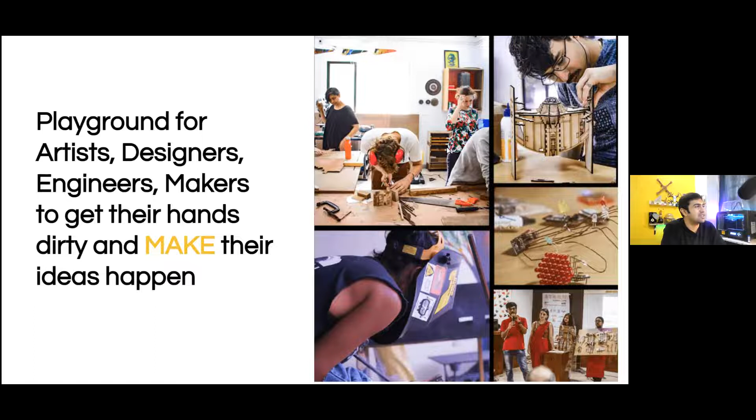Giving you a quick background, Makers Asylum is a playground of its own sort for different folks like yourself - artists, engineers, designers, people from all different backgrounds - to come together and build stuff. That's how Makers Asylum started, in a small space in Mumbai to create a space for people to build things. Now we're in Goa, inside a heritage home, but inside there are a lot of different tools. When we started, because we have these labs from 3D printers to laser cutters to carpentry to electronics, a lot of people started coming to us to also learn, and that's when a lot of our programs began.

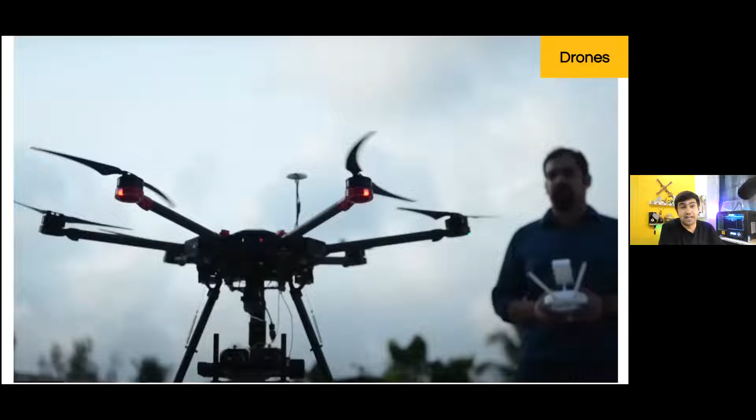This is one of the exciting programs you guys might be a part of, the robotics program happening over the summer. Slowly these programs started to become bigger, and now there are alumni from our program in 30 countries. So that's a little background about Makers Asylum - it's an alternative education space where people come to learn how to build things with their own hands and try out different things with technology. A lot of different startups have come out of our space too, including Quidich that works in drones.

Now, I think all of you guys know a little bit about drones already. These guys are shooting all the IPL matches. Some of you might be cricket fans - how many cricket fans out there? Raise your hands. There you go. So some of the drone footage that you see is actually from Quidich, one of the startups that was born at the Asylum a long time back.

Prosthetics. Now, one of you talked about how you can make robots that also integrate with human bodies. So there are a bunch of guys still working on prosthetics and building robotic arms that are able to sync up with your body.

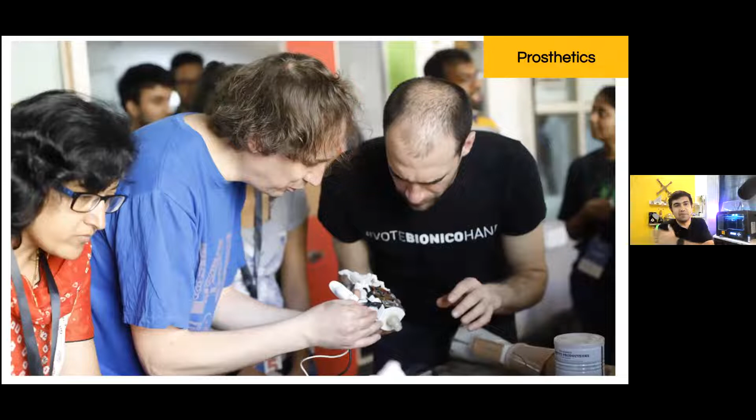Today's guest speaker is going to be Orangewood Labs. Orangewood Labs started off with the simple thought of making customizable furniture. However, from there, they went to Y Combinator in the United States and did a lot of exciting work. Now they're building 6-axis robotic arms that can do a lot of things. Abhinav, who's joining us from Hawaii in the middle of the night, will be talking more about it. I'm going to try and catch hold of him in a few minutes.

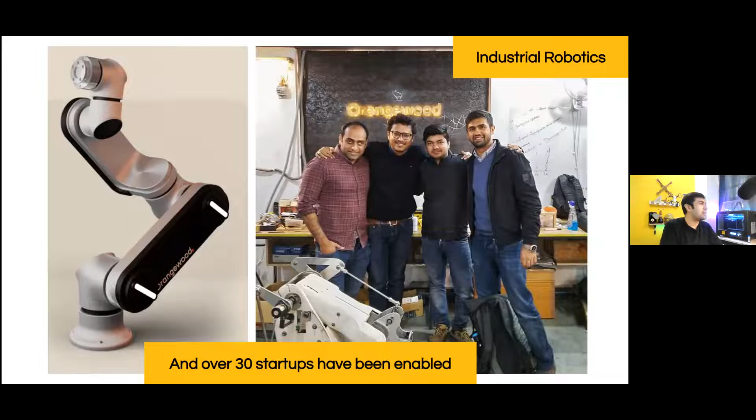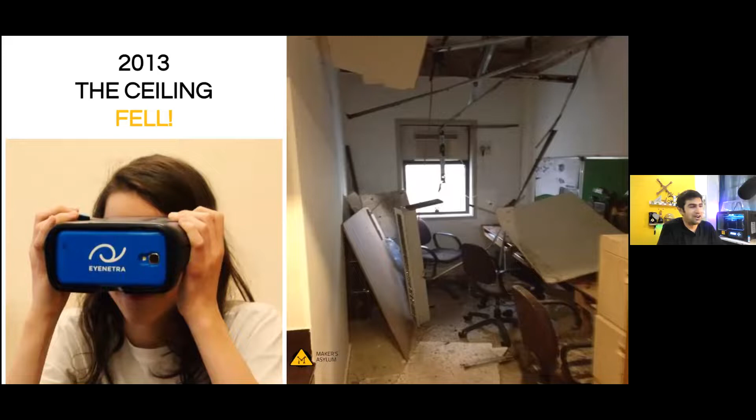All of this, Makers Asylum, started in 2013 when I was working on a different device called EyeNetra, and the ceiling of our office broke and fell down, breaking pretty much everything inside our little lab in Mumbai. That's when a bunch of people got together, guys like you and me, to build simple things like furniture. That's how Makers Asylum was born in 2013, through a little activity just like this. And then eventually we set up our own little garage.

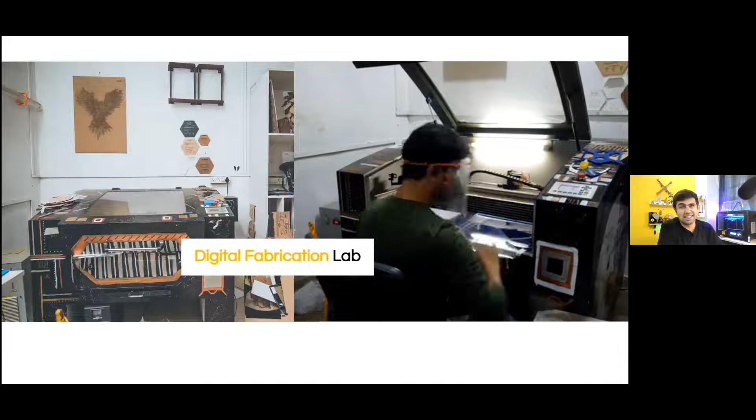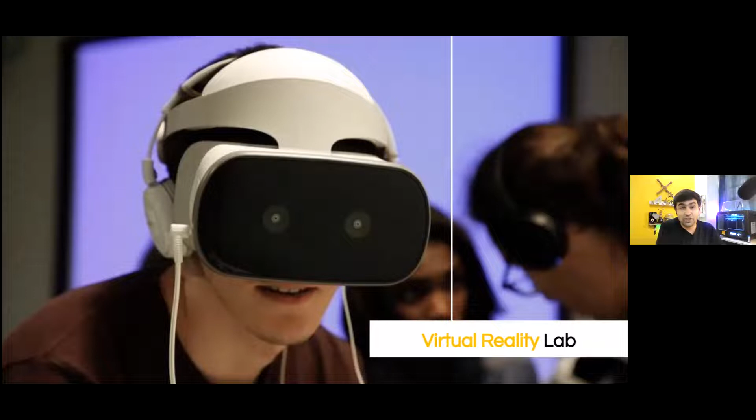Over the years, Makers Asylum is also known as this sort of hub or asylum for creativity and innovation, and the community has been learning and sharing together over the years. At the physical space, we have everything from a woodworking workshop, metal shop, a digital fabrication lab with laser cutters and CNC machines. There are 3D printers, over 15 of them at the space right now. There are electronics labs, a virtual reality lab, and pretty much anything and everything to get your hands dirty and make your ideas happen. That's what Makers Asylum is all about.

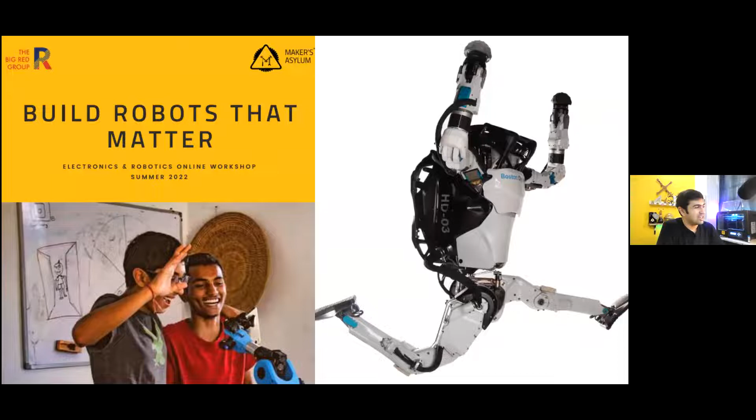Today, we're going to be talking about building robots that matter and how we really create some exciting robots. So let me ask you this question now. I'm going to stop sharing my screen and we'll get back to this later. What kinds of robots do you think there are actually out there? Anyone want to raise their hand? Feel free to unmute yourself and speak. It would be awesome to turn on your camera so I can see you guys raising your hands.

Athar, go on. Sir, I actually kind of know Tesla. Tesla is all about robotics cars, and their machines are also based on robots. I have seen a few on my system.

Nice, anyone else? So what kind of robot is a Tesla, for example, a car? So what would that be? I think it's a car robot that basically works whenever you want, your phone is connected to it. So wherever you are, it can self-drive to that position, and you can sit in it so that you don't get wet, kind of.

We have a couple more hands. It's a self-controlled car. Okay, great, Arif, do you want to go ahead? Sir, it's an AI robot. AI is basically like robots with artificial intelligence. Like Tesla and all these robots, they all have AI, artificial intelligence.

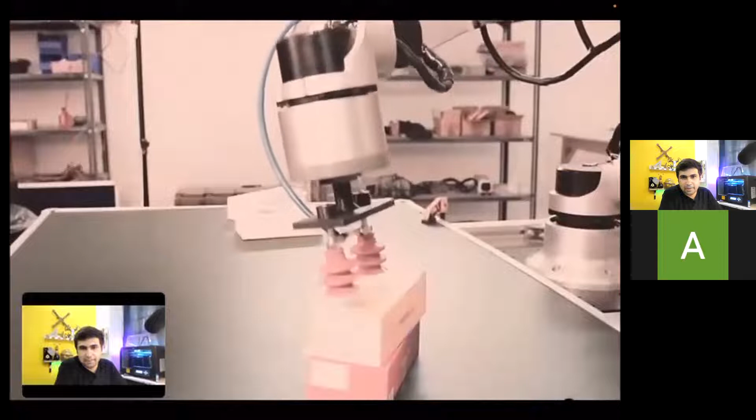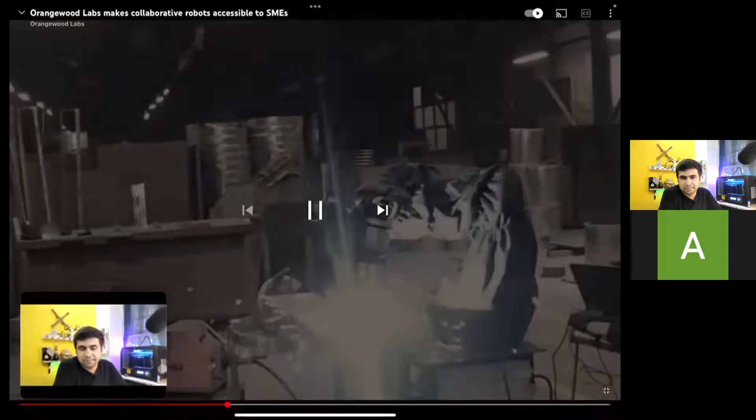So this is a video of some of our robots working in factories and in our lab. This is something which we have built in Noida. This is probably the first collaborative robotic arm built in India. What it does is it has a programmable 6-axis, that means it's like a human arm, but something which can be programmed. So that lets us do repetitive things which humans are no longer interested in doing, and that's what we are able to do.

So let me just... I hope you were able to see that, and yeah, that was really cool. So you said one very interesting word over there, you said collaborative robot. Can you explain that a little bit further as to what do you mean by collaborative robot?

Yeah, so what happens is specifically with robotic arms, they started back in the 80s, and mostly most of the customers were the automotive companies which use robotic arms for welding. You might have seen the Tesla factory, where there are these large red robots moving around, and you wouldn't really see any human on those lines because robots are like, let me just, just to make it a point, let me just start my camera again. So if I just instruct it to do this thing again and again, it's like if I'm closing my eyes and then I'm just doing this again and again for maybe 1,000 or 10,000 times. So what happens is these things are really large and they can basically kill humans if they are on the line, it's very, very dangerous. And that's why most industrial robotic arms are supposed to be inside cages where humans are not allowed. Now with collaborative robots, you can actually have humans working around them and they're completely safe to work around.

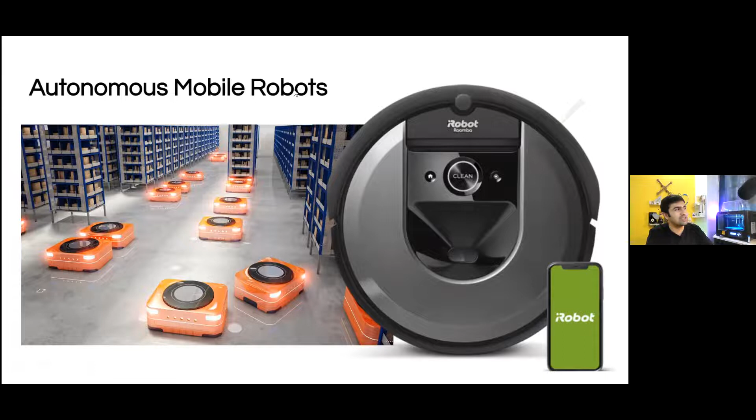Yes, it is a self-cleaning robot, sort of like a Tesla as well. One of you were talking about it. It drives around wherever it wants inside your entire house, maps out your entire house, and then goes around cleaning it. Similarly, there are these robots inside factories as well. All of these kinds of robots are called autonomous mobile robots.

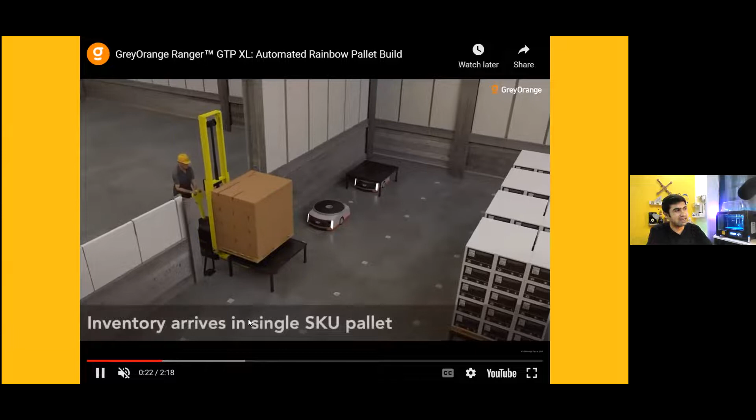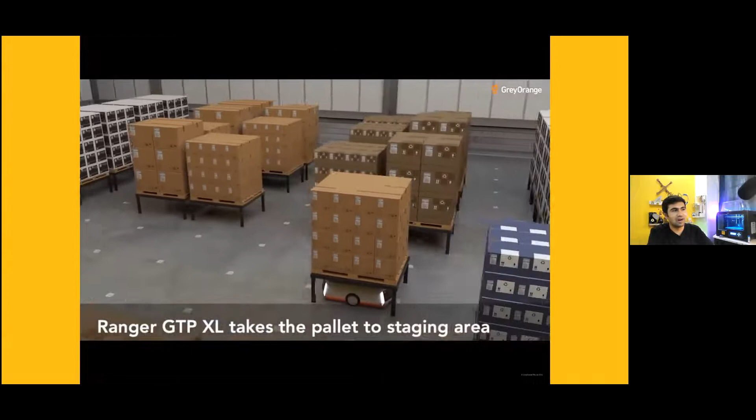All right, let's go and look at a few others. Let's see. This is how they work usually. I'm just going to skip forward. Even I know that some of these robots are also used by Amazon. Yeah, these are like the modern day factories right now that are using these autonomous robots and moving things around inside factories these days. Literally one of these robots comes, takes it to their place. No human needs to actually go and touch things. It just keeps moving inside in these factories. All right, let's go to the next one.

Do you guys know about humanoid robots now? Anyone heard about humanoid robots? The humanoid robots are purposely designed to look like humans and act like humans using artificial intelligence. Very good, that's very nice, Praneeth.

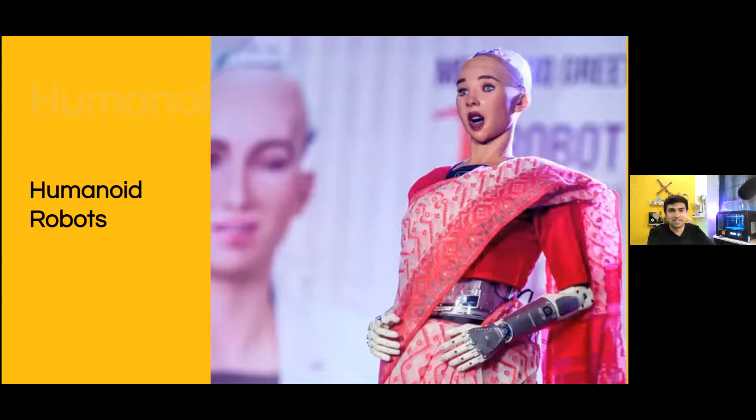Do you know, have you seen Sophia before? Do you know what Sophia is? Yes sir, so Sophia, it was a humanoid robot created by some lab, I think. I don't exactly remember. Yeah, Sophia was one of the first humanoid robots that was created. Actually, there were many others that were created before Sophia as well. But what was exciting about Sophia was just the way she was able to answer and talk in a much more witty fashion. Sir, I think Sophia was also the first robot citizen, human robot. Yes, correct, she was the first robot citizen as well.

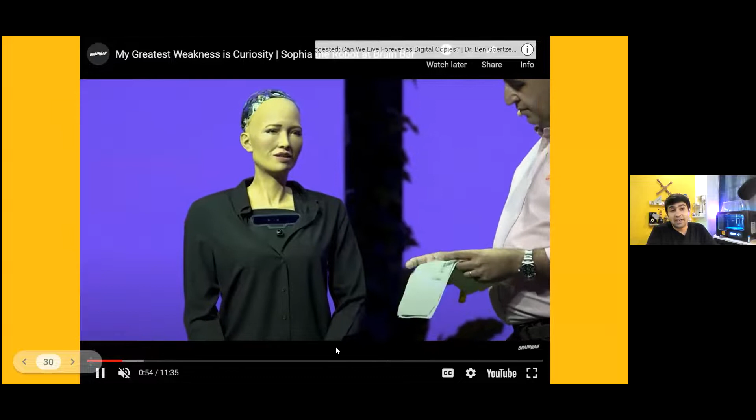And you can see a little bit of Sophia in action over here, where she's actually having conversations at events and talking about different things that she cares about or she likes. However, they're limited to the answers in the way that they're programmed earlier on, and they're speaking them out as well.

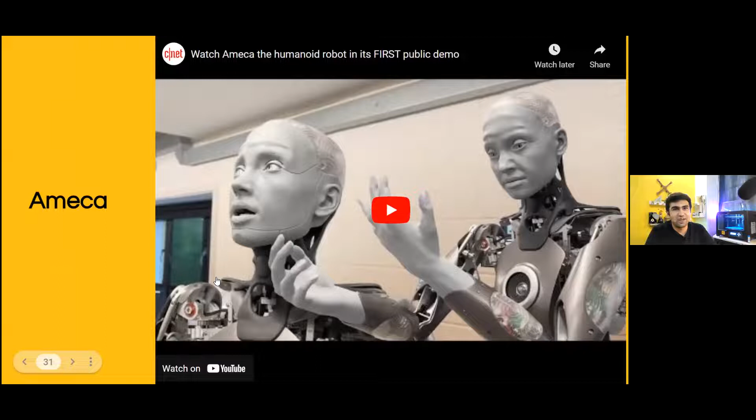Similarly, have you heard about this one? This is the new one these days, Ameca. Anyone heard about Ameca? No sir, I think. Okay, you guys will love this. Ameca is a new age robotics humanoid robot that actually mimics all sorts of facial expressions as well. Can you see her expressions? She's able to create pretty much anything from a smile to all sorts of expressions.

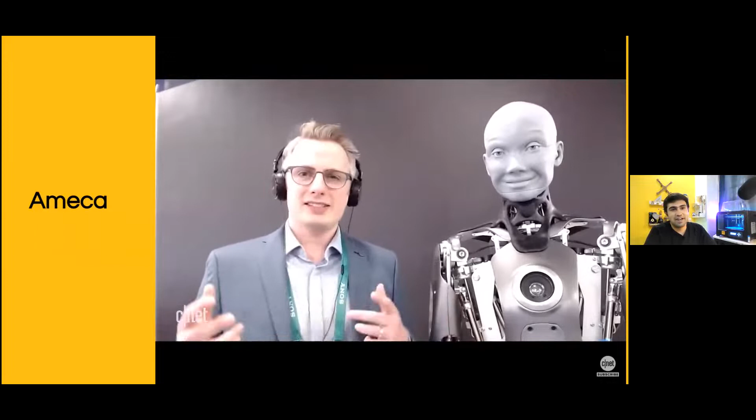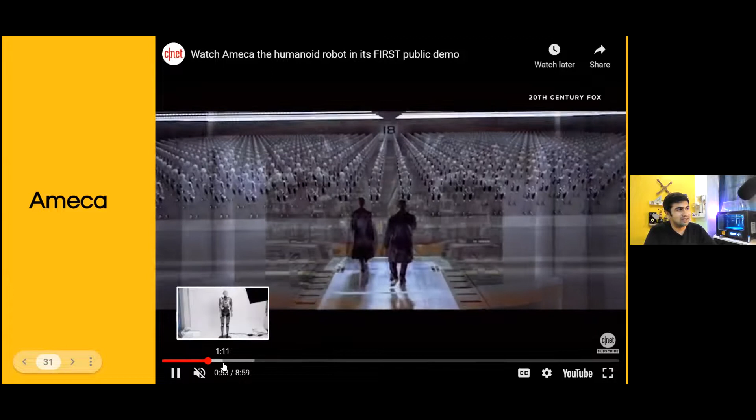It's a lot of like designed by folks in the art field and engineers, of course, working together. So there was a beautiful collaboration over there to create a robot that's able to not just speak and look like humans, but also express like humans. Yeah, and of course, there is this thought of I, Robot, the movie, where it's inspired from.

Exactly, very good. Anyone else? Somebody else wanted to share something? Okay, so these kind of robots are called dynamic, highly mobile robots. They're very, very complex to build. But yes, like you said, they can do a lot of different functions. They can't just move, but they can also carry out complex tasks.

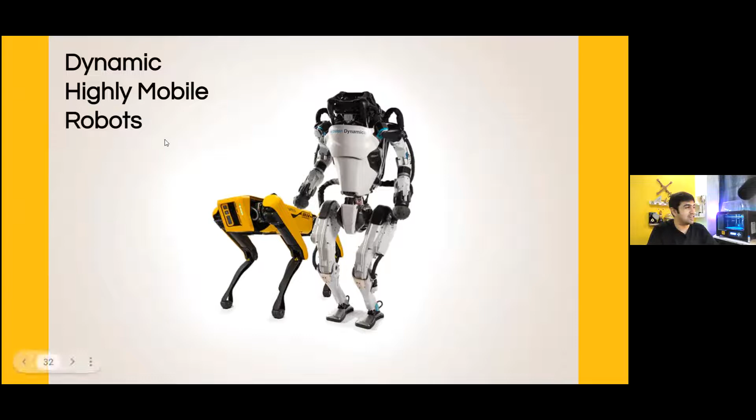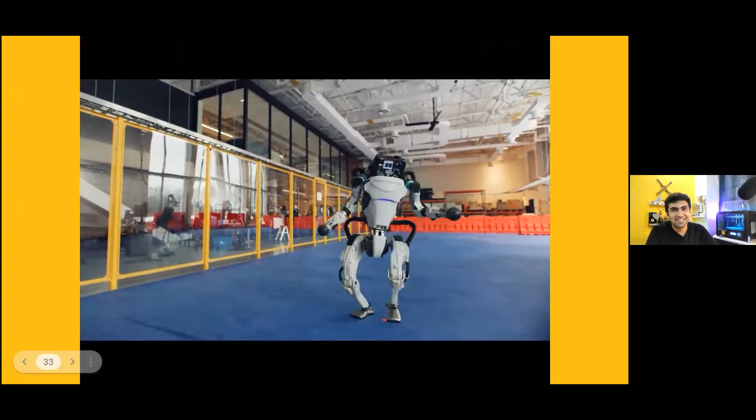Let's look at one of them in action. Any of you seen this video? Sir, I saw the same video. Yeah, so this guy dances as well, it can do a lot of things. I don't know if you guys can hear the music. Sir, we can. Okay nice, so that's the Boston Dynamics robot dancing.

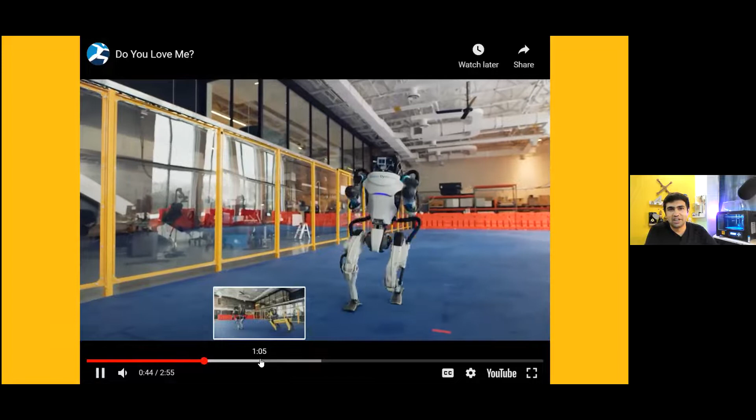That's a lot of degrees of freedom. Very, very complex. And sir, that one is the one that is like the style of the dog.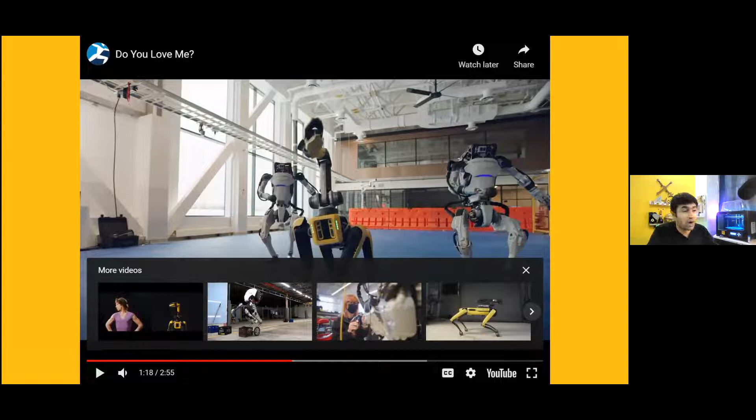Yeah, so these guys have a supreme amount of motion. They're able to move, communicate, have different senses around their body that let them accept input from the environment and react to it in different ways.

Pretty much right now, the cutting edge of robotics is happening over here with the dynamic ones. Then the next round of robots we talked about were cobots, which is what Abhinav is building. These are cooperative robots, able to cooperate with human beings and create stuff, while being in an environment where humans and robots can coexist. Very, very exciting space right now, something we're going to see in the next 2 to 3 years. It's going to be around us pretty much everywhere. Soon at Makers Asylum, hopefully we'll have one of the robots serving coffee.

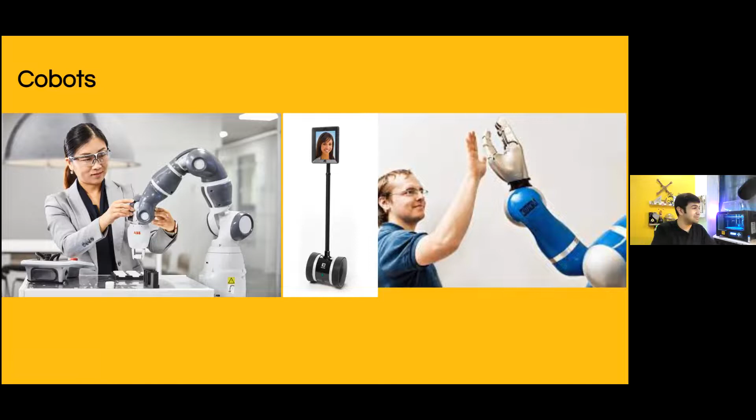Then of course we have hybrid robots. And actually we did have a robot serving coffee even earlier, but that's a story for a different time. Check these out - there's another breed called hybrid robots, where you have autonomous robots at the bottom and a cobot on top. So you have two different kinds of robots merged together, and these are called hybrids.

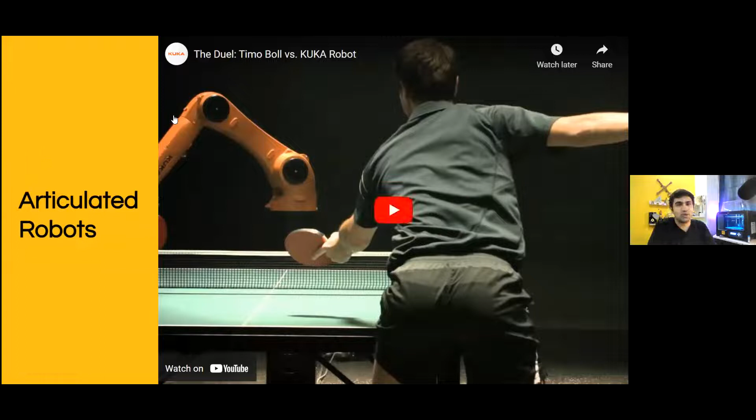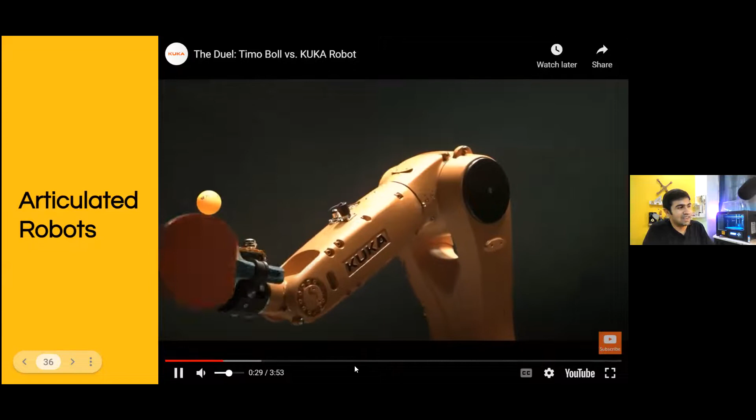And finally, we get to the articulated robots. This is the most exciting one for us because this is what we'll be building in our course coming this summer. Check this out - that's the KUKA arm. Anyone seen this one? Anyone know about the KUKA arm?

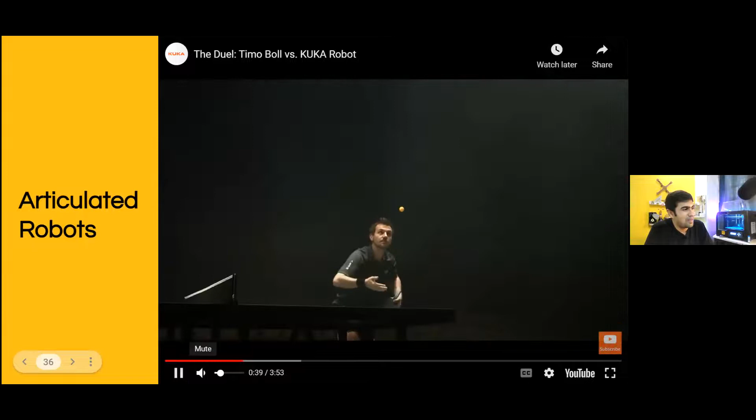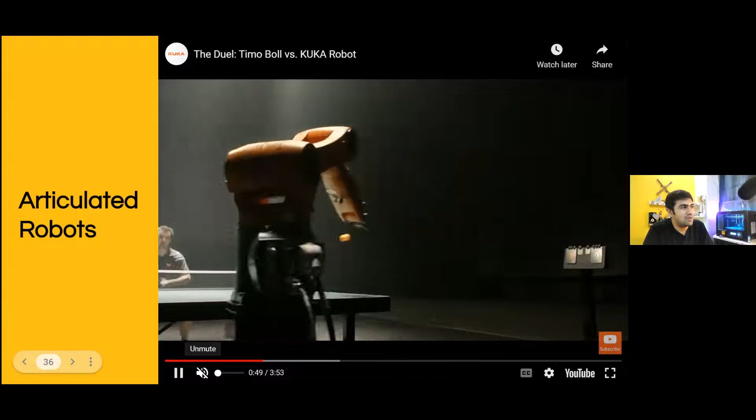No sir. Okay, in this case he's playing table tennis, but the KUKA arm can do pretty much anything and everything. You can ask it to build a house and it can do that, because at the end of the day it's a robotic arm that can print like a 3D printer.

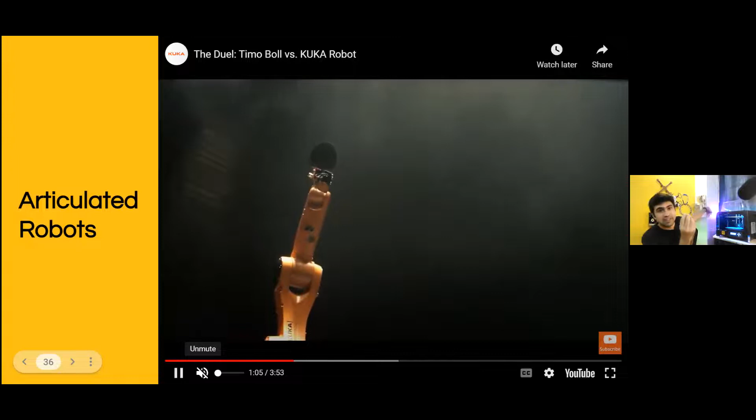And by the way, I don't know if you guys noticed, I was printing something over here and I printed this thing for you guys - a little stretchlet straight out of the 3D printer, just made in the past 5 minutes.

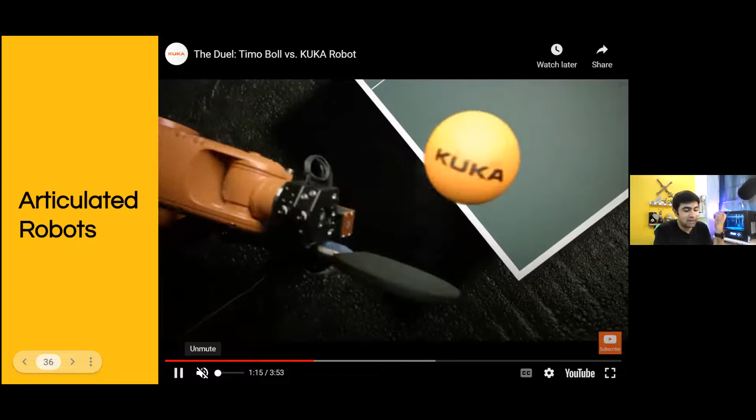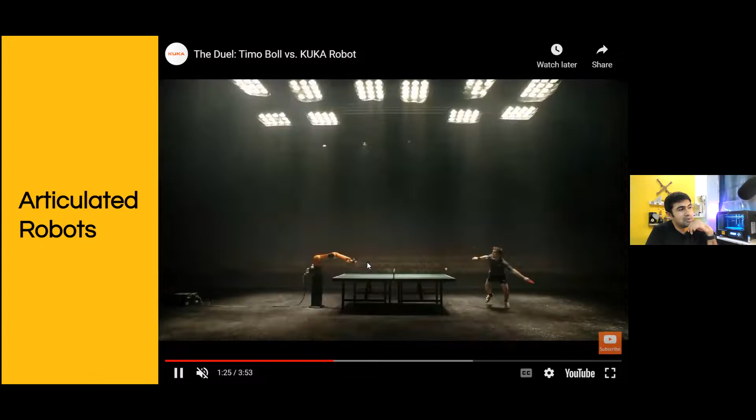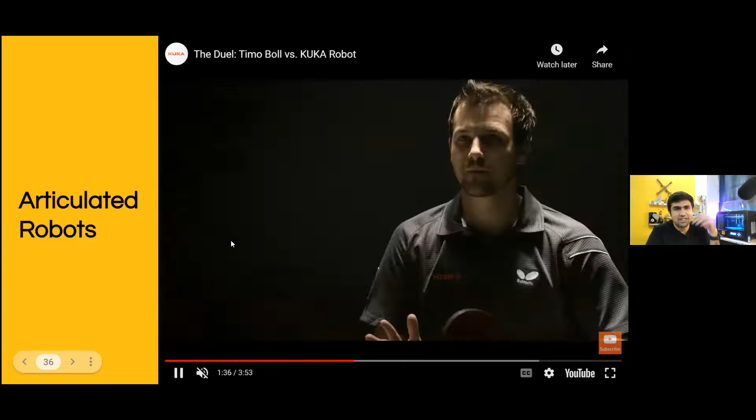Again, a 3D printer is a form of a robot. And similarly, a KUKA arm over here is also a form of a robot that allows you to move in multiple different 6-axis dimensions and do pretty much anything - from playing table tennis to building houses to welding in a factory or painting a wall - whatever you wanted to do, whatever you can program and whatever you can imagine with it.

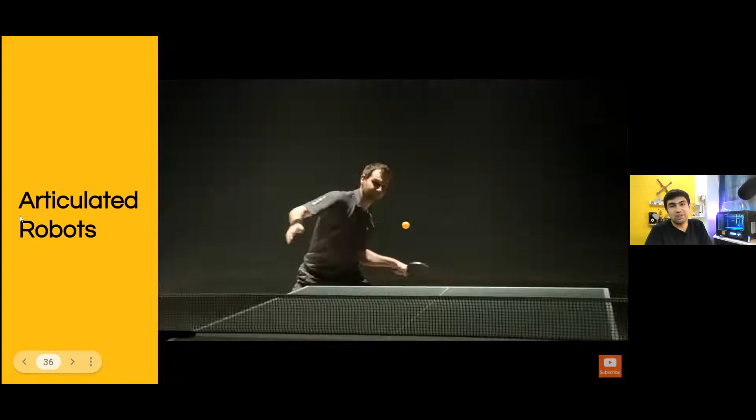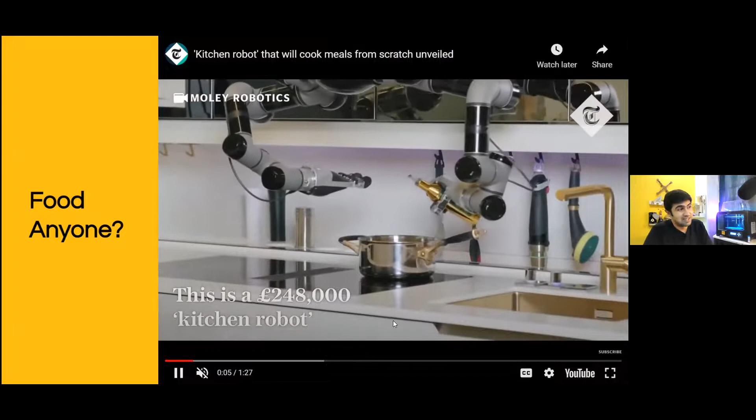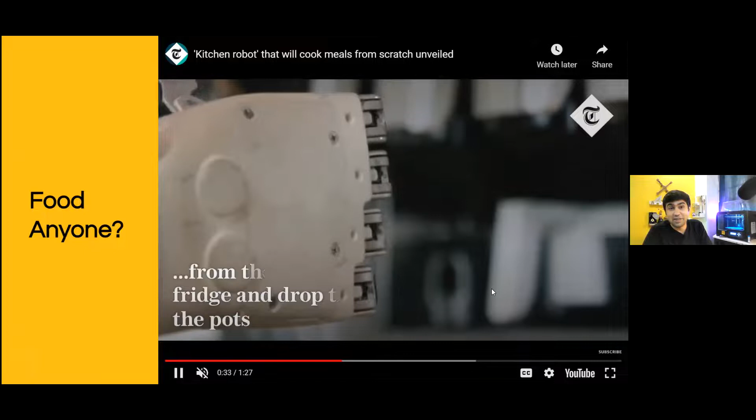Another form of a KUKA robot or another form of a robotic arm is these - these are cooking robots, yes sir, at home. And very soon, hopefully, we'll get to see some of them in action, and maybe something that you guys can build over your workshop this summer.

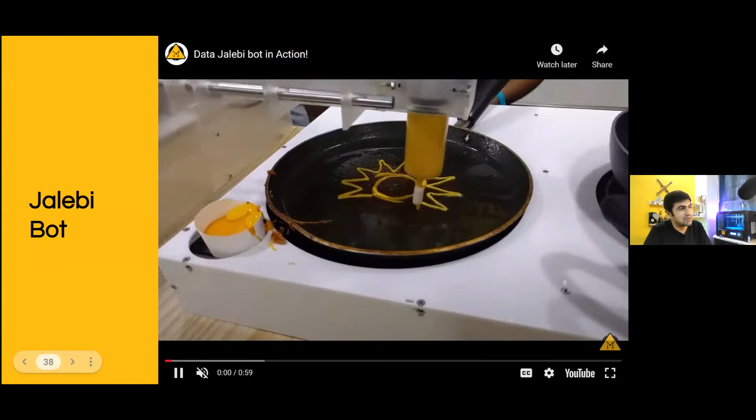This is something that we built at Makers Asylum just some time back - it made jalebis for us. Very, very fancy looking ones.

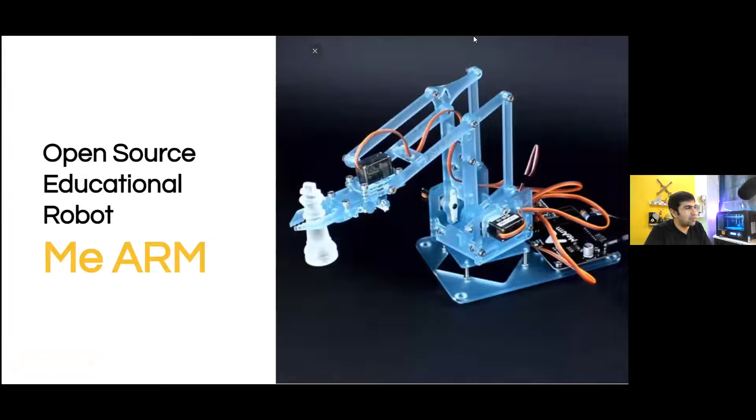All right, with that I'm going to come to MeArm. Anyone heard of the MeArm project? All right, great. So this summer, what Rishi is also going to talk about a little bit, we're having a workshop or program on robotics, on building robots that matter. And the way it's going to work is that all of us are going to build our own robotic arm, similar to Orangewood Labs, similar to the KUKA robot - a small version of it called the MeArm.

It's an open source educational robotic arm that each of you will get to build using an Arduino. Anyone know what an Arduino is? Yes sir - it is basically a microcontroller. Sir, it's a type of ARM chip. It uses pins and microcontrollers. Sir, actually I've worked with Arduino before this. Nice, so perfect - if you've worked with Arduinos before, then this is going to be super fun.

Because what you'll be doing is building a robot using an Arduino. And once you build a robot using Arduino, you'll have a bunch of sensors with you in the course where you'll come up with a problem statement and a solution. What do you really want this robot to do? So imagine if you wanted to clean your garden, or create something to help clean the water, or whatever it may be - you can use these robots to do that and use the sensors to program it to get input from the environment and react to it accordingly.